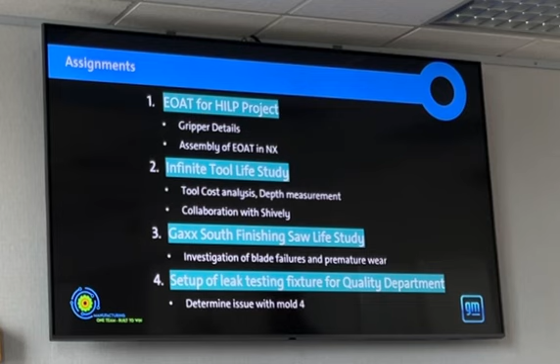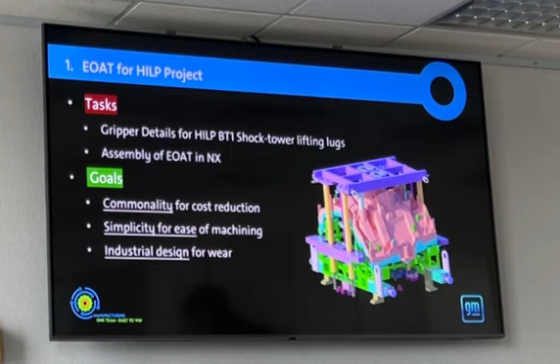So my first main assignment, which I got assigned very early on, was an EOAT for the HILP project. So these lifting lugs were getting added to the shock tower, and I was assigned to design the gripper details that actually pick them up off of the bench, and the end-of-arm tooling in NX. And I had 3 main goals that I was able to achieve with my final design, which I wanted to go over with you guys now.

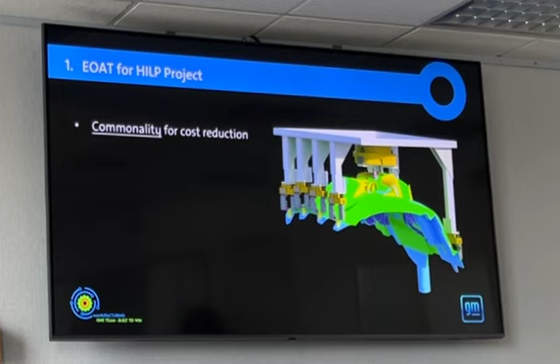The first was commonality for cost reduction. So we have 3 lugs in space that are randomly positioned based off of the shock tower, but in space they're all just sort of sitting. So I knew commonality would be important, so that way we could bring costs down, but I knew that if I made things common, it would help with my second goal, which was simplicity for ease of machining.

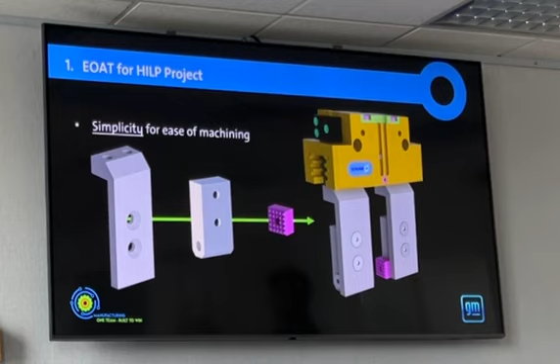So the 2 pieces that you see on the left are my final design, which get merged with the piece in the center for the gripper. And I know at face value it kind of just looks like simple lines and rectangles, but this is the accumulation of over 7 weeks of working with the tooling engineering team and learning the very important but minute details about how to actually make tooling and how to make tooling that works well on the floor.

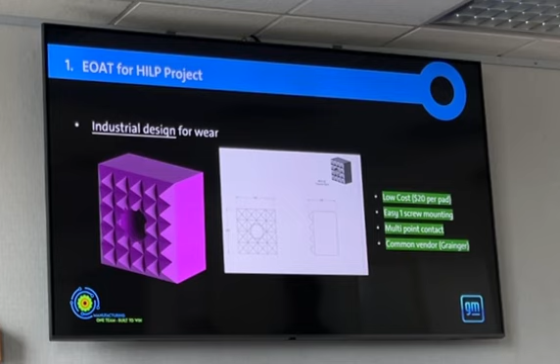And for my third goal, I wanted to focus on industrial design for wear. And I did that with this small pad that you saw in the middle. Now, this pad's important because rather than having to remachine an entire finger, you can simply re-screw in a pad that's from a common vendor, which happens to be Grainger, and also relatively low cost in comparison to remanufacturing or machining an entire finger.

And this is where I tie it back into the idea of continuous improvement. What you see at the end was this very simple set of rectangles, but that had very varied iterations over the course of my 10 weeks here, which I consider different shapes, sizes, and approaches to actually picking up this lug.

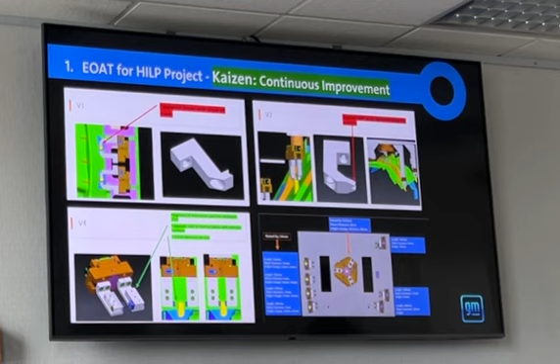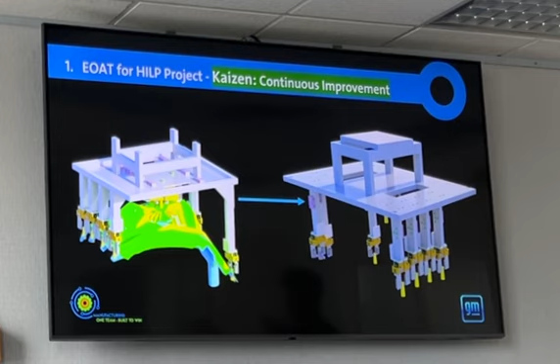My end goal is the accumulation of those lessons learned and the embodiment of continuous improvement. This is the actual end-of-arm tooling. There are some final tasks I need to take care of this week with Miss Jill regarding a weldment file and final machining file, but as you can see in my first rough iteration on the left and final iteration on the right, simple rectangles, but infinite lessons learned in between with daily tweaks and improvements.

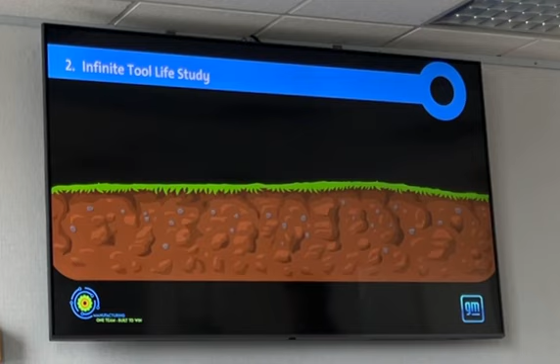For my second assignment, I wanted to start with an analogy. So if you thought about digging a hole and your boss gave you a shovel, we'll call it shovel A, capable of digging a hole one foot at a time. But the manufacturer says you can only use it about 100 times, meaning theoretically you can only dig about 100 feet in the ground.

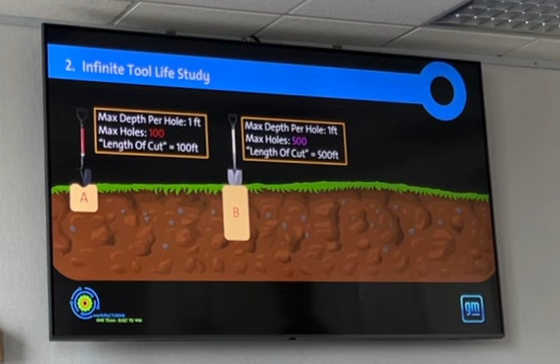Say your friend has shovel B, same company, different manufacturer. That shovel also digs one foot at a time, but it's rated for 500 holes, so you essentially get 500 feet in the ground, five times the total digging capacity. Then lastly there's shovel C, same thing, one foot at a time, but rated for 1,000 max holes before the manufacturer says this shovel is no good and you have to buy a new one.

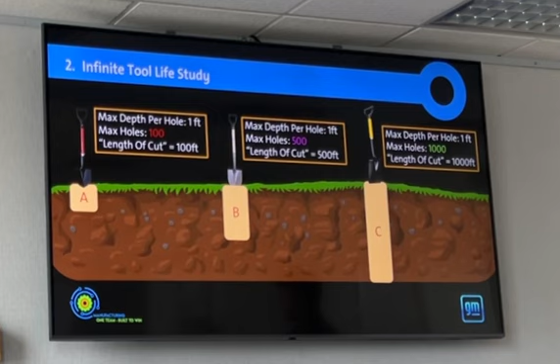So these shovels represent the tools we use out on the floor, different manufacturers, and sometimes even the same manufacturer but with different ratings. The question is, why is shovel A rated so much lower than shovel B if the application is very similar? I mention that because my assignment was essentially to find potential cost savings in low-performing, high-cost tools.

This was done specifically in the GAX machining department, and my tasks were to determine important tool variables and verify the actual data, things like cutting speed, checking if what's in the process sheet matches what we're actually doing on the floor.

Then, just like digging a hole, if you look at something like a drill over the course of its life cycle, you determine the depth of cut, how far it's actually drilling. Once we have all that data, we investigate the tool with the largest savings potential.

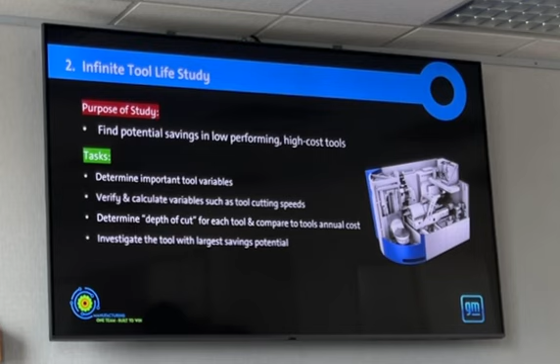I started with the analogy because at the end of the day, the actual work was looking at process sheets and CNC programming, verifying data, and generating an Excel sheet. I knew that if I just said 'this is what I did with my assignment,' it wouldn't be as intuitive as demonstrating it physically. So instead of going through the Excel sheet directly, I thought I'd give you an analogy for how I created it.

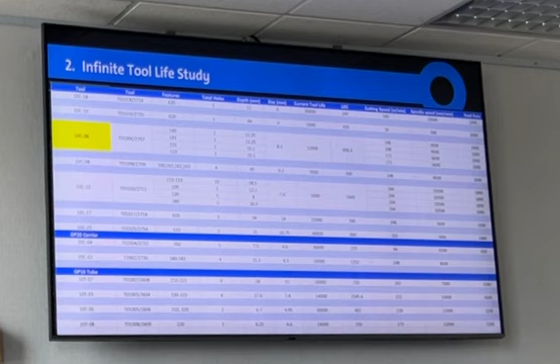The first thing I did was select a tool group to study, and that was drills, since we have a lot more drills than any other group. After selecting drills, I gathered the data by going through the sheets, inputting it into an Excel sheet, and calculating the length of cut.

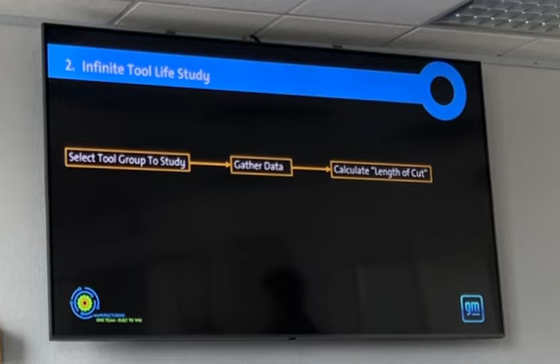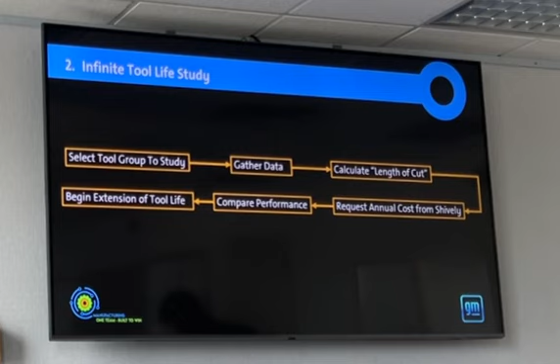To reiterate, a drill is going to drill a certain depth over the course of its life cycle. Then I worked with Shively to get the annual cost of what we spent last year on the drills I listed out. I compared the performance, then chose an investigation for the tool I selected, and I wanted to go over a couple of these points more specifically.

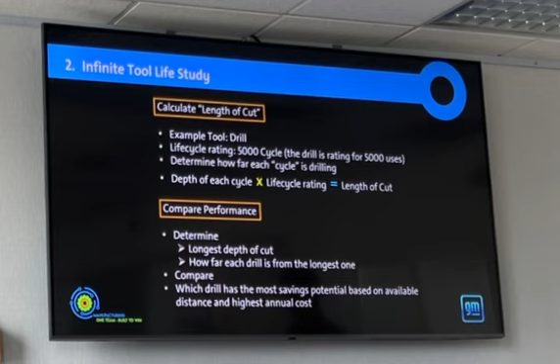Just like the depth you can get in the ground with a shovel, there's a certain length of cut you can get with a drill, and that's the formula I used to determine it. For performance, after gathering all your data, you can generate a graph that might look something like this, and there are a couple of important things I wanted to point out with this data.

Drill 10 on carriers is able to drill the quote-unquote furthest. If you think of it as depth in the ground, we're getting about 1,600 meters out of that drill. So it begs the question, why are all of these other drills, which you can see their depth in the darker blue, not able to achieve that?

We have a very similar drill, drill 3 on tubes, able to achieve a very similar distance, but all of these drills in between are not able to. So inherently you'd think we'd go after the one that's the worst performing. Why isn't drill 8 able to get up to that 1,600?

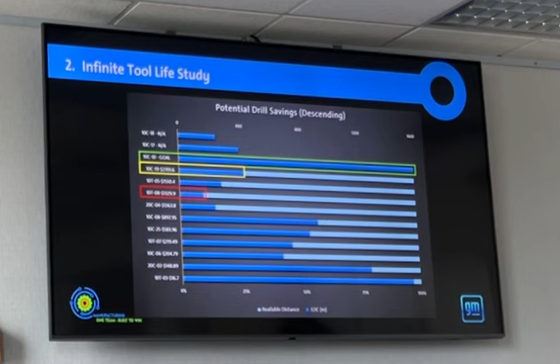It's not even able to get a quarter of that. Well, I decided to investigate drill 19 because it's ironically the one we spend the most money on, and it's only getting about a quarter of that distance. So my tool study is currently going on. For those of you that aren't directly familiar with what drill 19 does, it does feature 820 out of the carrier. It's the return lube channel.

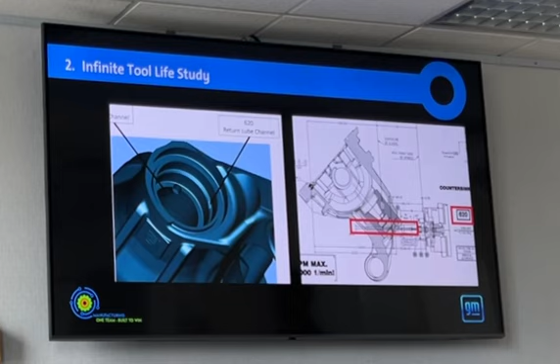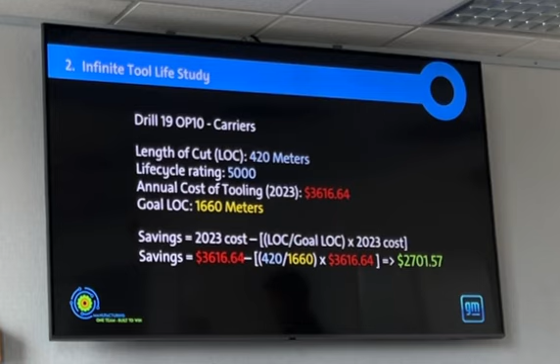So it's an awkward drill. I have a tool study going on right now, which is basically extending the life of the tool. So far it's been successful — we haven't broken any drills, and we're pushing the tool life to get to that 1,600. Here are some statistics, and that's the formula I use to calculate the actual savings potential. While I'd love to say at the end of my 10 weeks I saved the plant millions of dollars or tens of thousands, I know that that 2,700 is important because it starts the conversation that we have all this hidden savings within the plant. Where else can we start having the conversation of how can we save money?

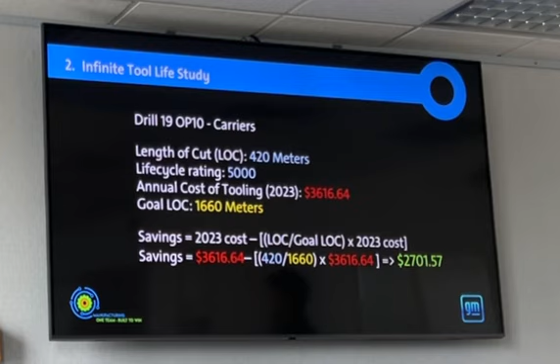So you did not change the tool? You just ran the existing tool? Just extending the tool life. Okay, yep, and then monitoring it every day. Yep, and it hasn't broken so far. And that's being done under the discretion of Mr. Keith.

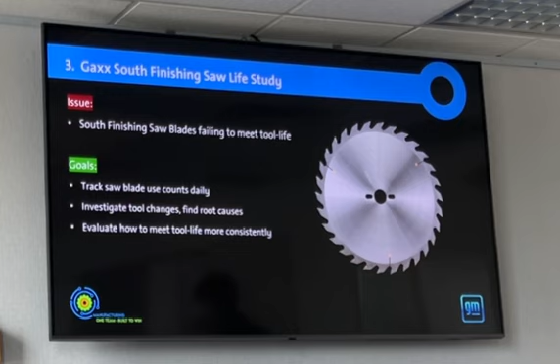My third assignment is very similar to the one I just described, except I'm looking at the saws in south finishing. It's very well known that they don't meet tool life. We've gone through a manufacturer change, which has been able to get them cheaper, but for whatever reason they're still not even meeting half of the tool life they're rated for. So I had a very simple task: just investigate why they aren't. And those are the goals I used to achieve that task.

The reason why these tools aren't meeting tool life is because there's no formal replacement procedure for these saws. An operator will go in, and if it's missing 4 to 5 carbide teeth, replace it, and then we basically have a wasted tool — something that could have gotten full tool life is only getting about a third. So this is undergoing further investigation by Mr. Keith to develop a formal replacement procedure.

My last assignment, which was — go back real quick. The 110 and the 120, are those identical blades? I think they are, yep. It's just 110 for both tubes and carriers is the more tough cut. Did you compare — I wonder if the blade's not good enough for 110, can it go live on 120 for another, whatever? This is an easier cut, you know what I mean? Yeah, you didn't study that, I'm just asking the question.

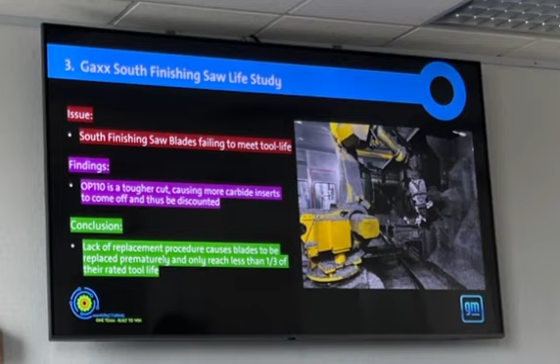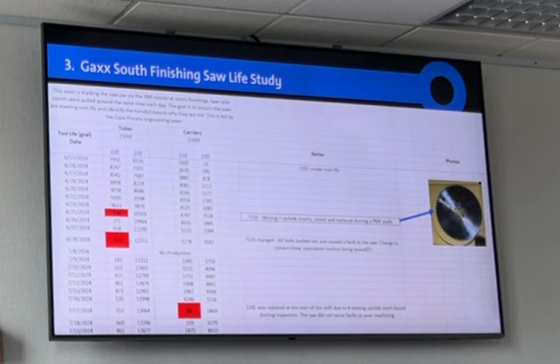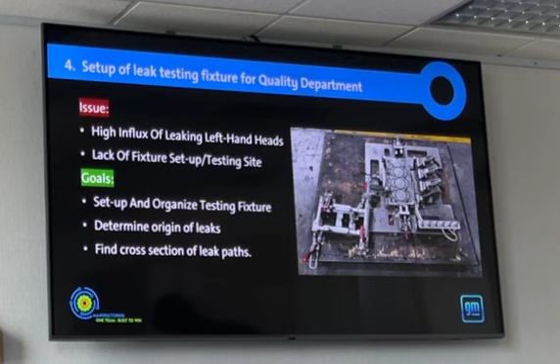My last assignment, which I did in the recent weeks, was to set up a leak test fixture for the quality department and test some heads. We had a high influx of left-hand heads that were failing due to leaks, and we had this fixture that was on a pallet, very dirty. My goal was to set it up, get it organized, and start leak testing. I was able to do that, got it cleaned up, and now I'm really good at testing left-hand heads and finding where they leak.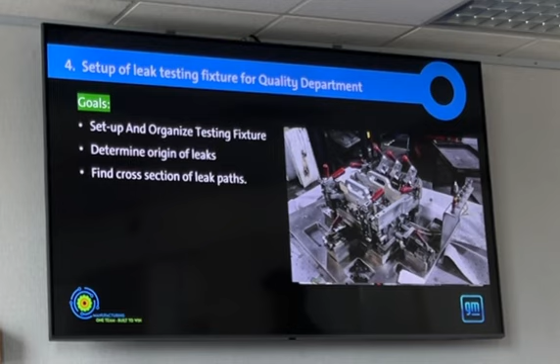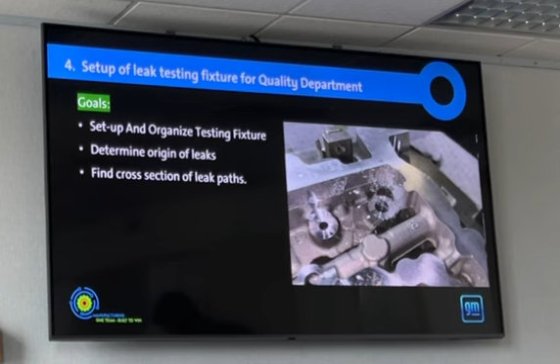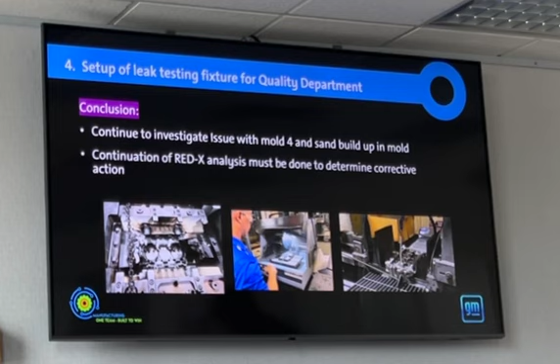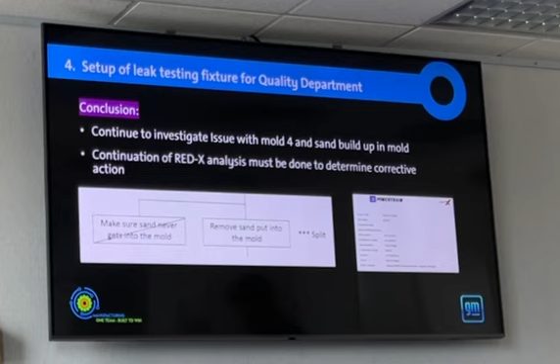When I started my internship, I had a running list of things I'd learned, but I thought once I got to this point it would be impossible to list all of them. So I chose a few very practical things. Countersunk holes can be used as a locator in the absence of a dowel—that's really cool to me. I also learned how to read CNC G code, position values, and speed.

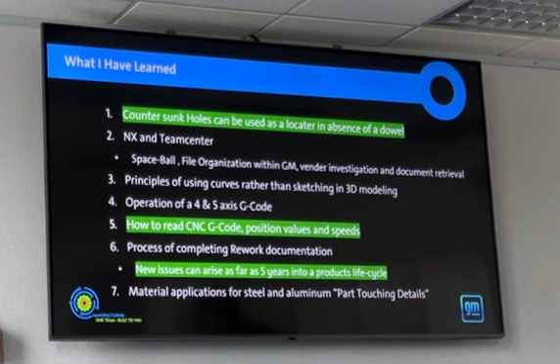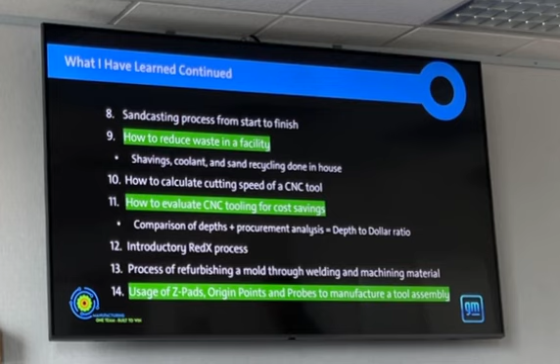I also learned, early on, that issues can arise as far as five years into a product's life cycle. To many of you that might be obvious, but to me that was pretty fascinating. I saw how here at SMCO we reduce waste by doing things like recycling coolant and metal chips, as I showed in my second and third assignment, in how to evaluate CNC tooling for cost reduction. Then recently I learned you can design things in NX, but you need to make them manufacturable, so I learned about the usage of Z-pad, origin points, and probes to manufacture the tool assemblies.

Practically, admitting you don't know how to do something is the first step of learning. I thought I knew how to do a lot of things, but being here I really had to make sure I put no ego into anything and stayed open to new information, even on things I thought I knew how to do. The fourth point: don't develop a good solution to a problem that doesn't exist. That's basically me saying don't isolate your thought process too much—get other minds involved, consider things outside of the box, as the saying goes.

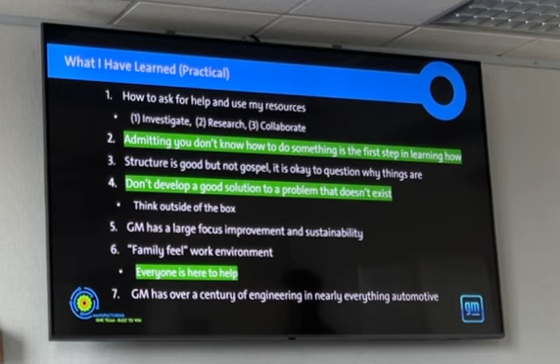In the fall of '22, I spent an internship with Tesla. Last summer I was with Flatiron, a heavy civil company, and they're making a new bridge in my hometown. This summer I was with General Motors, but I'm really passionate about fuel cell development in vehicles, so I hope in the future to continue to work with fuel cell.

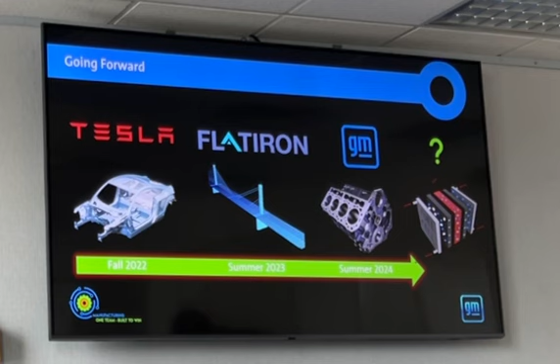I wanted to create an individual list saying thank you to everyone who has helped me, but I knew in some capacity basically everyone in the plant has really contributed to my time here. So with that, thank you.